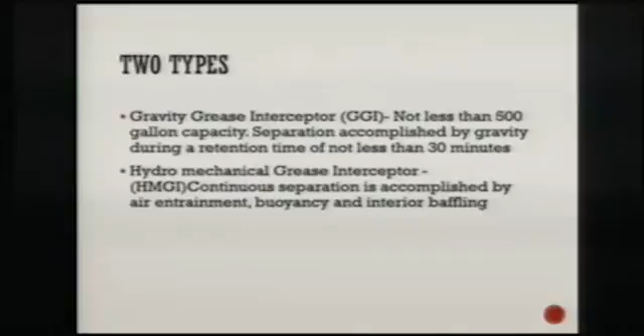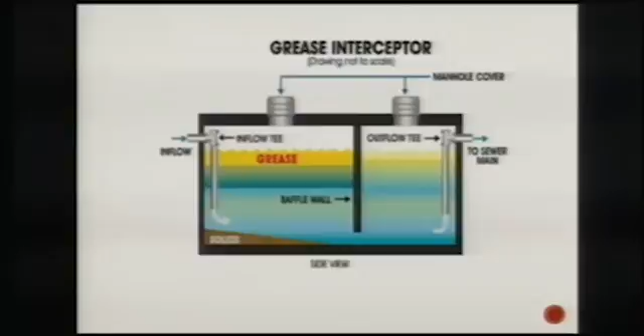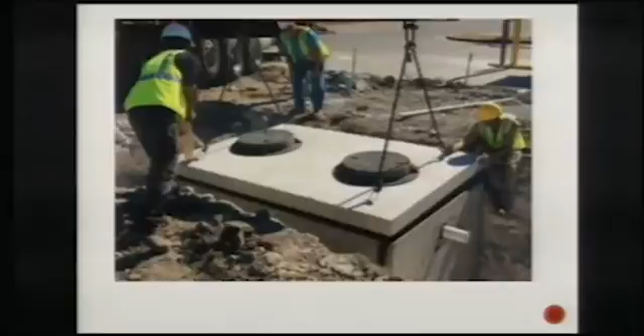Just a picture of a gravity-type grease interceptor. They can be pretty big. The minimum size is 500 gallon, but these can go well over 1,000 gallon or bigger if necessary. Same sort of thing here - you see the manhole covers on top for access for pumping, maintenance, cleaning, that sort of thing. So again, not too much to these really. They're not rocket science, fairly simple pieces of equipment.

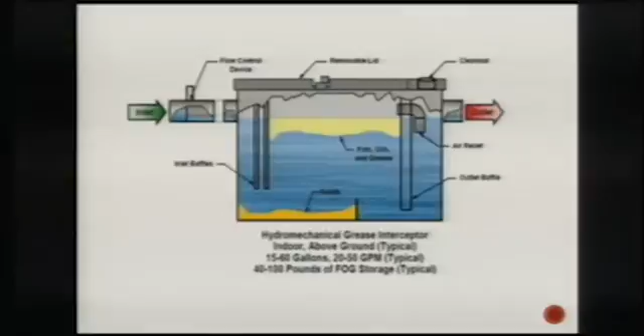This is just another hydromechanical type, and I threw this one in because those of you that have opened these and pumped them out and looked in them will understand, or seen new ones that you've installed. Each manufacturer has a different way of manufacturing their grease interceptors to trap the grease. You see this one has some very unique baffles in it, and there's a perforated screen in the middle that provides extra air entrainment as that liquid goes through there to help separate the grease.

The point being, when you open these up to inspect them and they're pumped out, they're going to look different usually depending on the manufacturer. They're not always the same. In fact, from manufacturer to manufacturer, many times they're quite different. As you can see, if you look at this one and then that one, there's a pretty big difference in how those two are manufactured. Those baffles also can be removable, so you can pull those screens, baffles, whatever you want to call them, out of there to clean them in some cases.

Sometimes over the years when some of these hydromechanical types have been there quite a while and they've been opened, every once in a while you'll find that one of those baffles got removed and somebody never put it back in again. Well, that's not going to be as effective now as it would be. It's not going to work the way it was designed. So you might check for that.

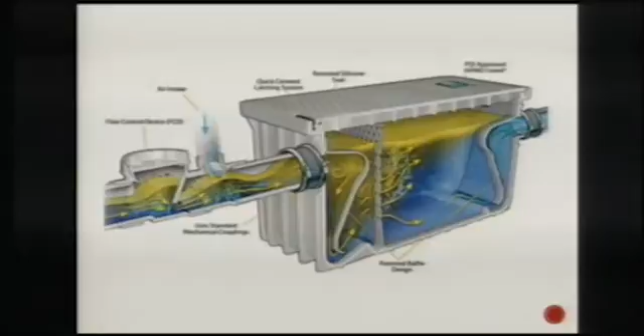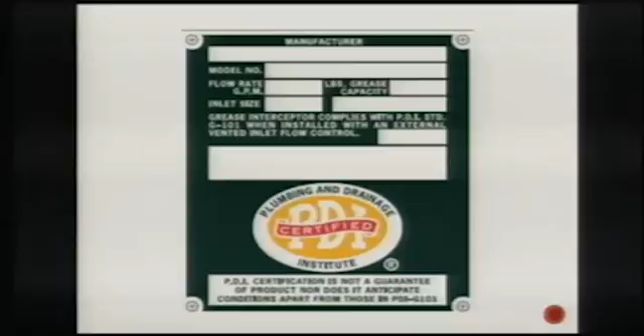I threw this one in again - those of you that have worked with these would know this is a typical label that will be on a hydromechanical grease interceptor. It'll have the flow rate in GPM, gallons per minute. It'll have the grease retention capacity in pounds, the inlet size, and there may be some other info, but when we're out inspecting these, that's some of the essential info we're going to look for. When I talk in a bit about how we size these things, that information becomes pretty critical.

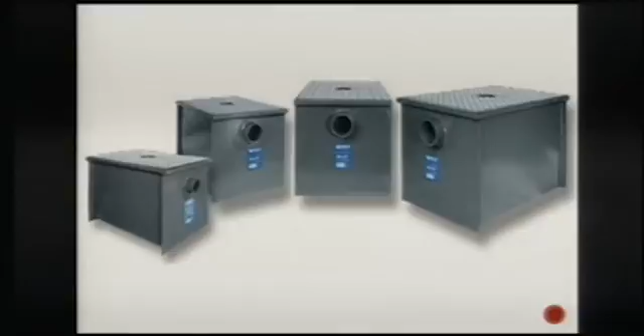Example of different sizes - again, everywhere from small to pretty big on the hydromechanical ones. The gravity ones can be many, many times bigger than these, but you can get whatever size you want within the range that they manufacture them. It's all based on how much grease that establishment is going to generate that's going to go down the drain, and how often they want to clean those.

Really, you can get by with a smaller grease interceptor if you want to clean it out more often. If you've got something that retains 60 pounds of grease, you're going to have to clean it a little less often than something that retains 40 pounds - one's a little bigger than the other. That's a choice that the establishment and the owner of the property have to make when they install these. But there's a minimum size, though certainly you can go bigger if you want to.

Now, I said we were going to talk about the flow control device on these hydromechanical interceptors. This is required by the code, and in fact the manufacturers of these hydromechanical interceptors also, almost all that I've seen, require a flow control device on the inlet side of the interceptor. It doesn't look like much. You see this one - there's different looks to different ones, but this one, when installed, is not much more than looks like a coupling in the pipe with a vent opening at the top.

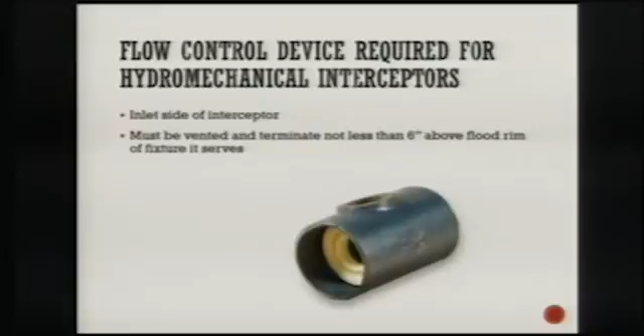So, flow control device required, vented, either 6 inches above or tie it back into your plumbing vent system, one of the two. Again, if you're just inspecting these, not installing them, just make sure that they have flow controls and that they're vented. So, questions on that? Okay.

We get the question, code gets this question, I think utilities gets it once in a while too: how often do you have to clean one of these things out? Well, nowhere does it say you have to clean it out. I think there is something in our ordinance now that says that, but how often you clean them really is also based on how much greasy waste goes down them. The more you pour or wash down that drain, the more often you have to clean them to get them to work effectively.

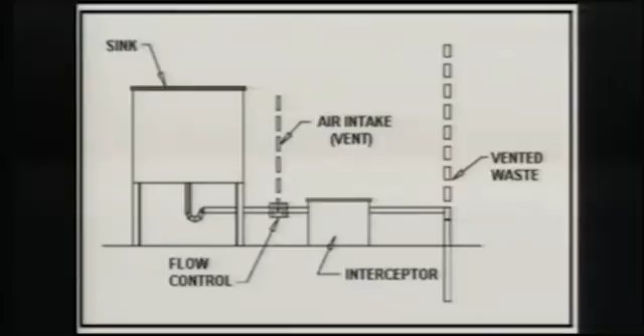It's also worth noting, when you open that interceptor up to inspect it, look for obstructions in the inlet pipe, the outlet pipe, maybe in the baffles, anywhere things can get stuck. As we all know, you get solid materials washed down the drain, whether it be food chunks or whatever else, and those things can wind up clogging those inlet and outlet pipes or parts of the interior of that interceptor. So another thing to check as you're looking inside those, that all of the pipes and screens, baffles, all of that, are clear of debris.

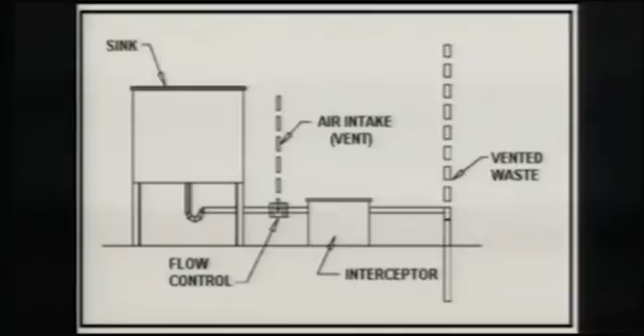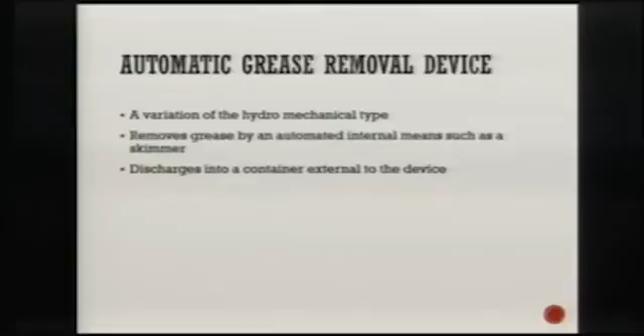Threw this one in because it's not a different type of grease removal device, but a variation of the hydromechanical type. It's called an automatic grease removal device—a hydromechanical interceptor that has an automatic internal means of removing the grease, usually some kind of skimmer that skims the grease into an external container. Here's a picture of what one might look like.

You'll see them installed in the same locations as you would any other hydromechanical interceptor, but they're just collecting the grease in an external container that winds up having to get emptied on some regular basis whenever it fills up. So there's not a ton of difference, with the exception of that automatic skimmer device that skims the grease off and pumps it to that container.

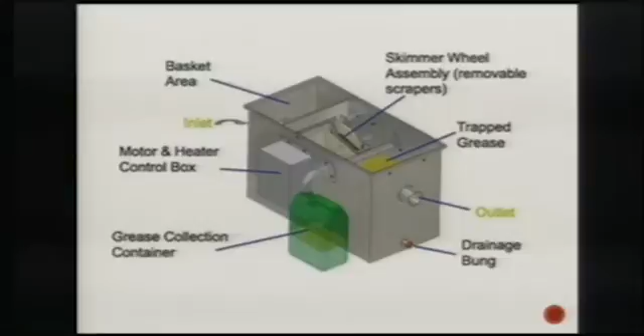This may be the single biggest question we get from everybody at the code office: where do I have to put a grease interceptor? The code requires them anywhere you're going to have grease-laden waste. It excludes dwelling units and single-family dwellings, so apartments and houses aren't required to install grease interceptors. But pretty much anywhere else that has a kitchen that might generate grease-laden waste, if it's commercial, it's probably going to be required to have a grease interceptor of some type. Not all, but most of the time.

The kinds of fixtures that would wind up going into the grease interceptor—I took this wording right out of the code—pot sinks, pre-rinse sinks, soup kettles, wok stations, floor drains or sinks into which kettles are drained, auto hood wash units, and dishwashers without pre-rinse sinks.

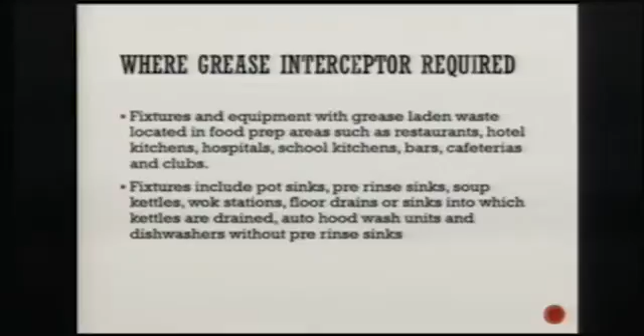So we get that question a lot: do I have to connect the commercial dishwasher to the grease trap? It depends if it has a pre-rinse sink or not before the dishes go in the dishwasher. So if it does not have a pre-rinse, then you do need to run it through the grease interceptor. If it does have one, you don't.

Now, where is it not required? Again, grease interceptors are not required in individual dwelling units or private living quarters—houses, duplexes, apartment buildings, all that sort of thing—they're not required there.

Also, people sometimes get the idea that, well, we'll just run everything through the grease interceptor, that way we'll be sure to catch everything, right? And that's not really a good idea, because the code actually says fixtures that don't contain greasy waste shall not be routed through the interceptor. The reason is that if you have too much flow through that interceptor, it's going to reduce its effectiveness. You want just the right amount of flow to trap that grease, and anything in excess of that may wind up washing some of that grease through the interceptor.

Other things—water closets, bathroom fixtures, hand sinks, lavatories, things like that—we don't want to see going through the interceptor. So what goes through there just needs to be the fixtures that are going to potentially generate the grease, fats, and oils.

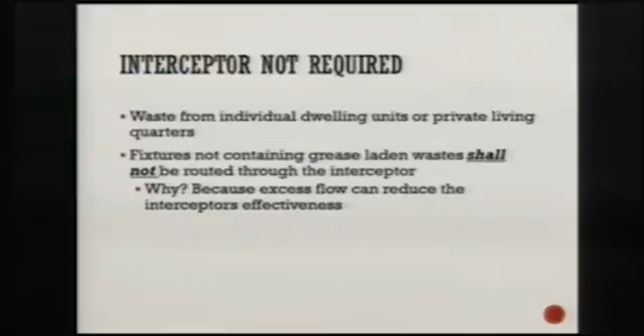Food waste grinders, garbage disposals—we'll want those to go through the grease interceptor, but they're required to have a strainer at the fixture. So make sure those have a strainer or solids interceptor at the garbage disposal or food waste grinder.

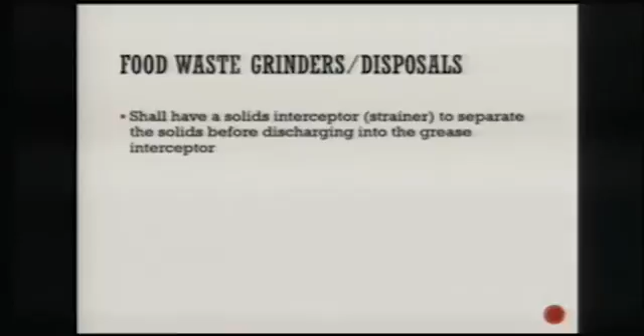I'll skim through this a little bit because it's not really related to inspecting these, which is the purpose of this whole class. But I did want, especially for the plumbers in here who might be installing these, to be aware of how these things are sized. When somebody comes to us and says, hey, so-and-so hired me to put a grease interceptor in, how big do you want it? Well, there's really not that much to it.

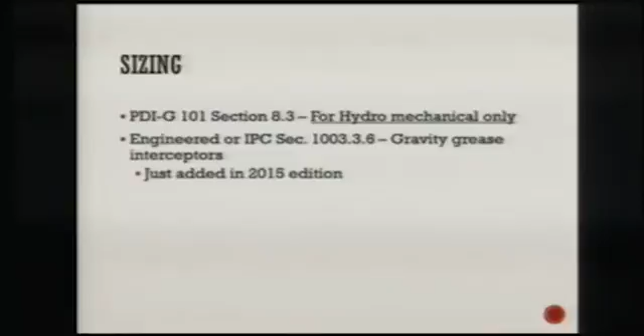PDI, the G101 standard, actually has a couple of different ways you can size hydromechanical grease interceptors. The first one, and the one I like to use that's about as simple as it gets, PDI has a table that essentially strictly works off the size of the inlet pipe for the hydromechanical grease interceptor. So if you have a 2-inch or less inlet, you want a grease interceptor that's 20 GPM. That number comes from the maximum full flow of a 2-inch pipe, which unless it's got a whole bunch of head pressure, is going to flow probably a little under—if you calculate it, it's about 19.5 GPMs.

So what it's doing is that grease interceptor is being sized for the maximum flow that you could get out of the size of pipe that's connected to your inlet. In a second I'll talk about the grease retention capacity, but the other part of sizing grease interceptors is GPM and grease retention capacity.

The grease retention capacity on these, I have found, is typically twice the flow rate. So for a 20 GPM hydromechanical grease interceptor, the grease retention capacity is going to be 40 pounds. For a 60 GPM, it's going to be 120 pounds grease retention capacity. So you'll see on the labels of these interceptors that you just double the flow-through rate, and that's the grease retention capacity.

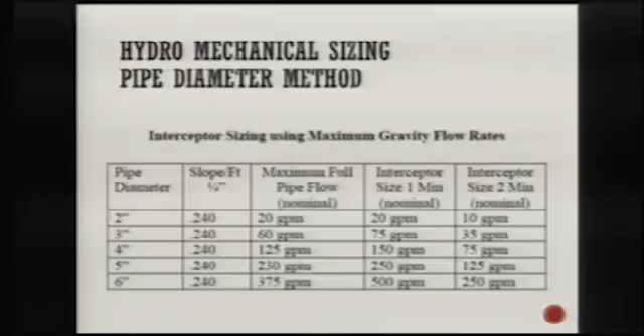Questions on that? That's the easy way. Somebody calls and says, I'm going to put one of these in. Well, what's your inlet size? 1.5 inch, 2 inch? Okay, use a 20 GPM. You want to go bigger, you can, but just don't go smaller than that.

Here's the other way, and I'm not even going to start explaining this one, but basically what you do is calculate the volume of every fixture that's connected to that interceptor, and then you use that amount of liquid capacity and make sure that your flow rate is equal to what's actually connected to it.

To me, you can use this if you want. If you want to get a copy of PDI G101, it's free. You just go to the PDI's website, and I downloaded a copy a long time ago and printed it off and put it in my code book. So if you guys want a copy, it's as simple as going to their website and printing it off. PDI G101, testing and rating procedures for hydromechanical grease interceptors.

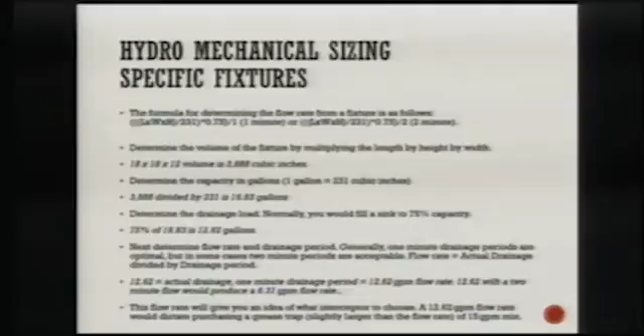I would suggest that you all get that if you're going to be doing this. It would be helpful, especially if you're installing them. It's really helpful in that respect.

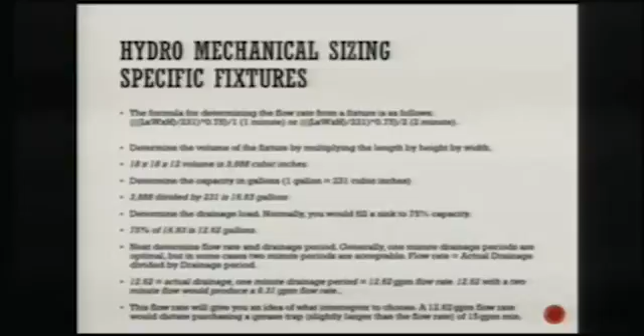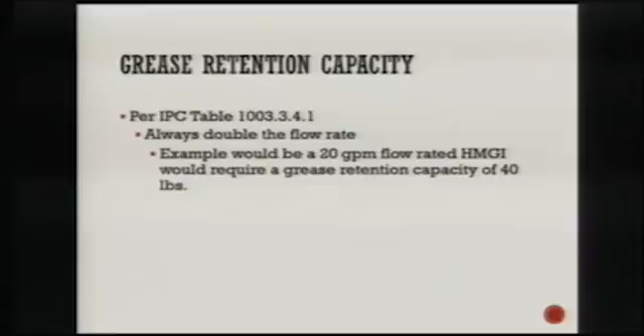Grease retention capacity, as I said, is double the flow rate. So if you're looking for a 40-pound grease retention capacity, you know you're going to need a 20 GPM hydromechanical grease interceptor. Now, gravity grease interceptor sizing is a little bit different.

It's based on making sure that liquid stays in that tank long enough for that grease to rise by gravity. So what it's assuming is a 30-minute retention time. So it's really all you're doing is making sure that the amount of liquid, the max amount that's going to flow into there, will stay in there for at least 30 minutes before it exits the tank.

So in the case, I'll just use this as an example. If you had a 2-inch inflow on a gravity grease interceptor, the flow rate of a 2-inch pipe is 19.44 GPM times 30 minutes. You need a 583-gallon interceptor. As I said, they can get pretty big.

I don't know that it's worth worrying about this much, because almost always when these gravity interceptors are installed, they're engineered. So you guys are installing them based on what's shown on a set of construction plans. The project engineer for a restaurant will specify the particular size of gravity interceptor they want installed based on the fixtures that are flowing through it. So again, probably not worth worrying about this too much, but it's handy info just to know how those get sized.

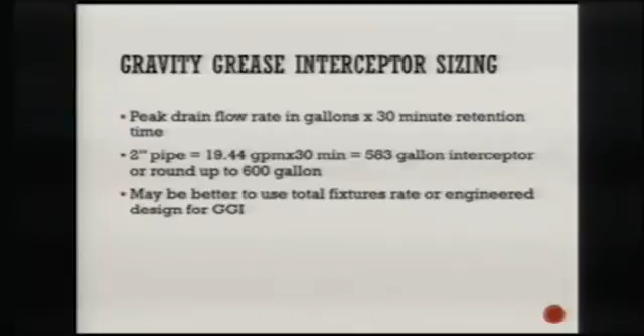That's really as much as I can tell you about grease interceptors, probably as much as you really wanted to know. But questions, anybody, on any of that? Again, it's not really a terribly complicated subject if you just kind of understand how they work. So if you're inspecting, if you know how they work and how they're supposed to be installed, then you can typically take a look and make sure that those criteria are met. So, any questions from anybody? You guys aren't normally this quiet, so I'm looking for any questions you got. Nothing. Okay, well, good enough.

I'll expect 100% on the test then, right? Thanks, I appreciate you guys listening to me today. Thank you, Brad. Good job.

to run the machine, which I obviously don't. So as I said, I'm just going to talk about the program requirements today.

The primary objective of the Grease Management Permit Program is to monitor and reduce the quantity of grease-laden waste discharged to the sanitary sewer collection system by food service establishments.

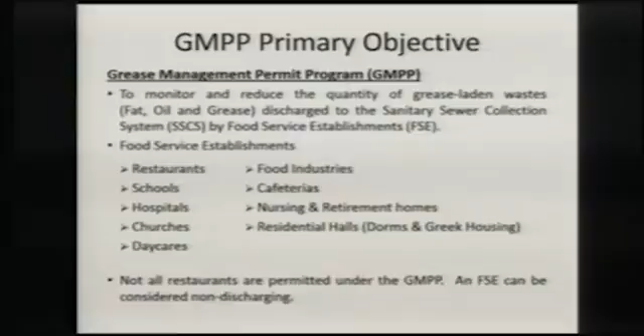Food service establishments can be anything from restaurants, schools, hospitals, churches, daycares, food industries, which I don't believe we have any contributing in Manhattan, cafeterias, nursing and retirement homes, residential halls. Not all restaurants are permitted under the program - there are a few in town considered non-discharging. That's based on how the food is prepared, if it comes prepackaged, what amount of preparation they do, and everything.

Some background for the program. As Abdu mentioned earlier, the first ordinance was passed in March of 2011, kicked off in January of 2012, and the whole thing began with the state and EPA directive to reduce sanitary sewer overflows that result in sewer discharges to the environment. It was first adopted in March of 2011, implemented in 2012.

The basics of the first ordinance were to reinforce existing plumbing code requirements for grease removal devices. The plumbing code at the time, and still, requires them in certain applications, but after that there was no requirement for maintenance or anything like that. We got reports that after the inspection, places would remove them so they didn't have to mess with them, stuff like that.

So that was one of the things we wanted to address with the program - also to permit all FSEs that produce grease-laden waste. The permit was more of a vehicle for tracking what was out there, and what kind of service was being done to it. We required annual inspections by a city licensed plumber to ensure proper operation and functionality.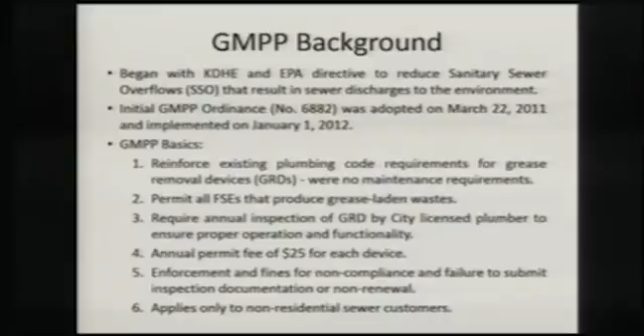There was the annual permit of $25, which - the program doesn't pay for itself by any stretch of the imagination, but anyway, that's that. Enforcement and fines for non-compliance and failures to submit inspection documents, or for non-renewal of the permits. And as Brad said, it only applies to non-residential sewer customers - houses, apartment buildings, whatnot didn't fall under the purview of this program.

Some of the consequences of grease-laden waste in the sewer system, and you guys know this more than anybody else - stoppages, backups, sanitary sewer overflows resulting in human health and welfare issues if you get sewage in a building or anywhere where it could come into contact with people.

And of course, who does it impact? Mostly it's the FSE that hasn't been doing the maintenance. They're the first place to experience the overflow, because most blockages occur first in the lateral lines before it gets to the sewer main.

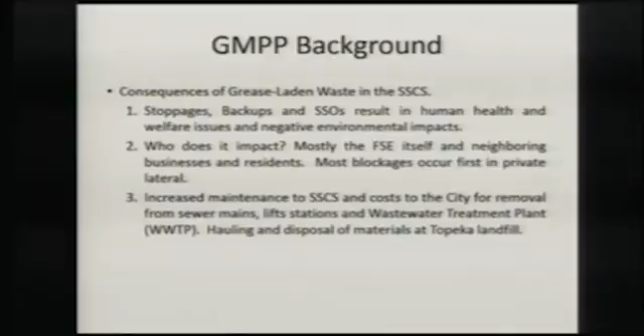Increased maintenance to the sewer system, costs to the city for removal of grease from sewer mains, lift stations, the treatment plant, and then hauling and disposal of those materials to the Topeka landfill. And since the program first went into effect, Topeka has quit accepting that kind of waste, so it's kind of really become an issue for us.

Some statistics of the program from 2012 to 2017, just the number of FSEs and the number of permits. You can see it's increased steadily over the years to this past year when we had almost 180 establishments permitted.

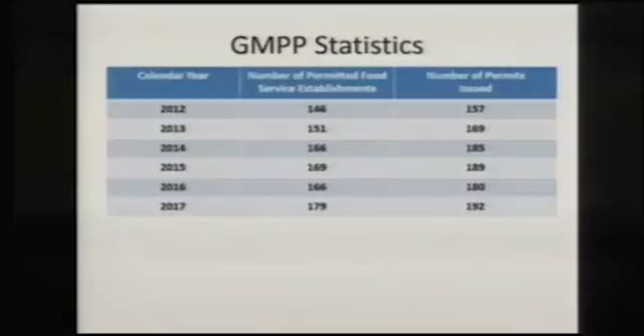And as Abdu said, since this was kind of the 5-year anniversary of the program, we did a review, looked at what did work, what didn't work, what our complaints were, got input from the food service establishments and from you guys.

The first iteration of the program was just a bare minimum of requirements, and it was lacking. The renewal process could be confusing for FSEs, and the most confusing part was that there were 2 dates - the permit renewal date and the inspection date.

When the program first started, most FSEs would get their inspection around renewal time, towards the end of the year. Then throughout the years, some places would get them early, some places late, until the inspections were strung out all throughout the year and didn't have any tie with the expiration date, and people would get confused. We'd send them a notice of violation for not doing their inspection, and they'd say, no, my inspection isn't due until December the 31st - there was just a lot of confusion.

Consistent failure by numerous FSEs to comply in a timely manner. The permits expired on December the 31st. We gave them a 30-day grace period before we doubled the permit fee to a whopping $50.

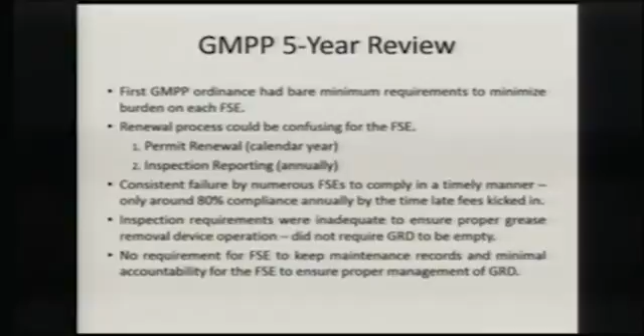This is just an illustration of the confusion with the 2 dates. So Buffalo Wild Wings here, the expiration date of their permit, of course, like everybody else in town, was 12/31. But they'd gotten on the ball one year and got it done early, and so their inspection was due in June. So that's a 6-month offset.

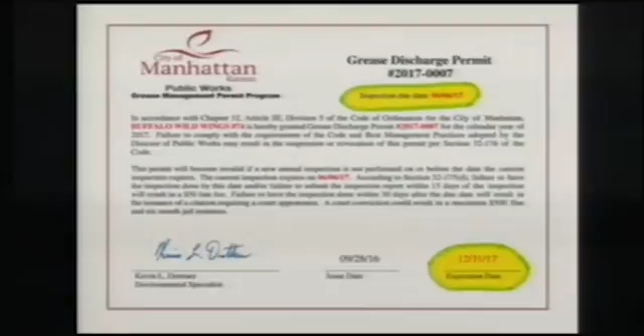So kind of our goal for this new ordinance was to help do away with some of that. Our new permit renewal process starting this year, we did an alphabetical permit renewal system, kind of like how you get your license plates, where A and B have to get their license plates in January, C and D in February, and so forth.

This is to kind of help spread the workload out, instead of everybody getting slammed at the end of the year about needing their grease trap cleaned out, needing an inspection, and that kind of thing. And we all know that the end of the year is a busy time anyway.

Annual inspection is still required, but the due date is aligned with the permit expiration date. For an inspection to be valid for permit renewal, it must be done within 60 days before the expiration date of the permit. So for Applebee's, for example, their permit renewal date is going to be...

January the 31st, since, of course, they start with A. Their inspection expiration date is also going to be January the 31st. And then there's a 60-day window in there for them to get their inspection done for it to be considered valid. So from the 1st of December till the end of January, anytime in that 60 days.

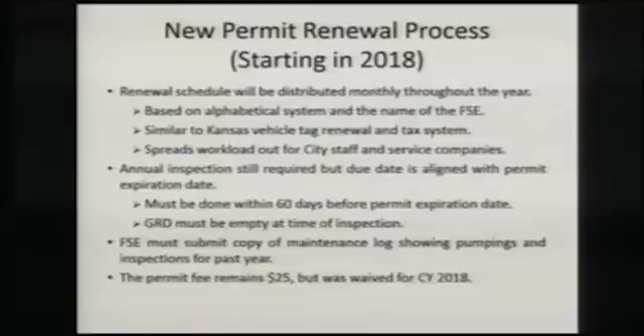And this is a graph about how the permit renewals fell in the old system, where the permits all expired on December the 31st, and you can see it kind of bumped along in September, October, November, and then wham, in December we had all these renewals, and then January and February and then March, kind of trailed off there at the end.

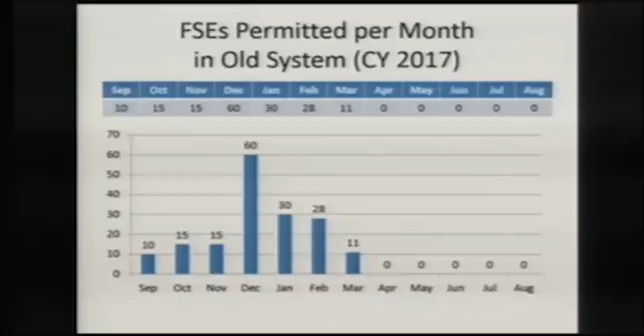As I said, there's a mandatory maintenance interval of 180 days. The old requirement was that the Grease Interceptors shall be maintained to ensure they operate continually, effectively, and as designed, which really doesn't say anything.

There's the industry standard for maintenance intervals, which is the 25% rule, where they need to be emptied when 25% of the volume is filled with grease and solids. Of course, that requires a lot of measuring, and we don't have the staff to do that.

And like Brad said, the proper maintenance frequency is ultimately dependent on the amount of waste that goes through that thing. So even though it has to be cleaned out every 6 months, that's not saying that that's sufficient. And if they need to clean it out once a month, then so be it.